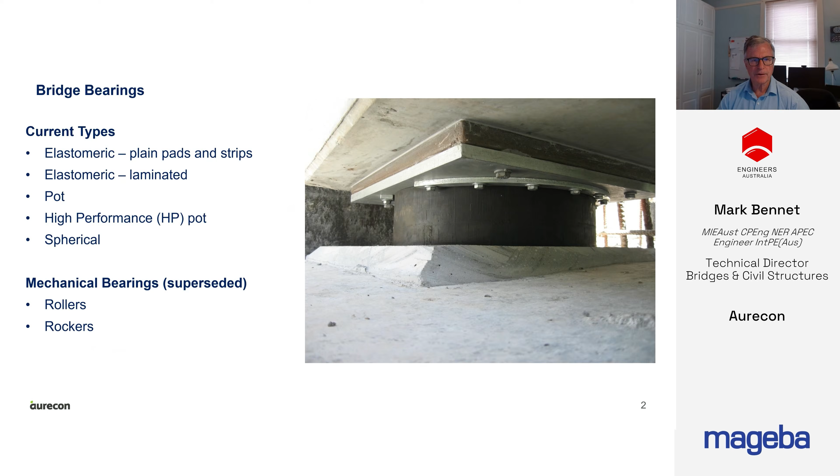The notional design life of bearings and deck joints is set as 50 years, except cast-in components, which should have the same design life as the bridge, and easily replaceable components such as deck joint seals that can have a shorter design life. One of the oldest installations of rubber pad bearings is in Melbourne on the railway viaduct between Flinders and Spencer Street Station.

This bridge was constructed in 1889. A sample of these bearings was tested in 1980 by the Malaysian Rubber Producers Research Association. The rubber hardness was measured at 63 and degradation was found to be minimal. It was concluded that the rubber bearings are still functioning satisfactorily after more than 100 years in service.

However, defects and damage can occur in laminated elastomeric bearings. This photo shows some strange exfoliation of the rubber, which I've seen on a couple of bridges, and also you can get splits and delamination.

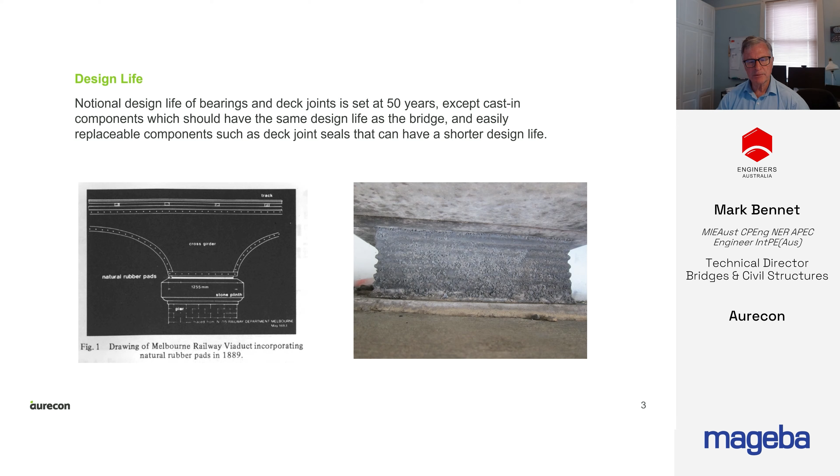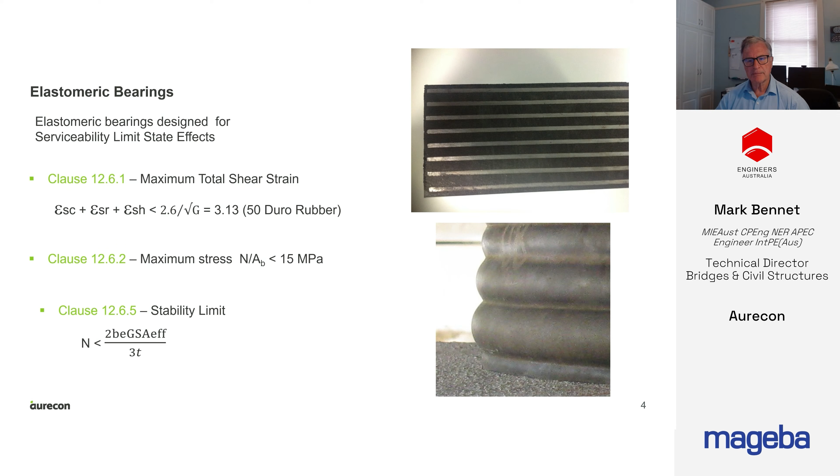Elastomeric bearings are designed for serviceability limits state. This photo shows a cross-section of a laminated elastomeric bearing. What you're looking for is nice uniform layers of rubber with parallel steel plates. In this bearing, the side cover is a bit deficient and the corners of the steel plates should be rounded.

Failure modes include splitting of elastomer and delamination of the elastomer from the steel plates. Normally the stress occurs over time due to cyclic loading. The bearings have significant reserve capacity for infrequent extreme events. So, a bit like fatigue, the design of elastomeric bearings is carried out at SLS.

Select elastomeric bearings over pot and spherical bearings if the load and movement range allows. They are cheaper and more durable than other types of bearings.

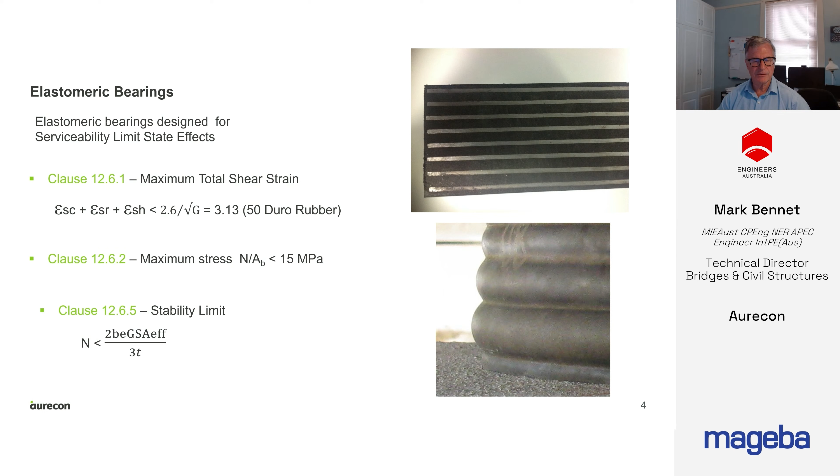The vertical load capacity is controlled by a number of criteria. The first is total shear strain, and you're actually calculating the strain in the rubber at the bulges between the steel plates. There's a general stress limit of 15 MPa, and there's a stability limit - bearings can undergo shear buckling as opposed to flexural buckling.

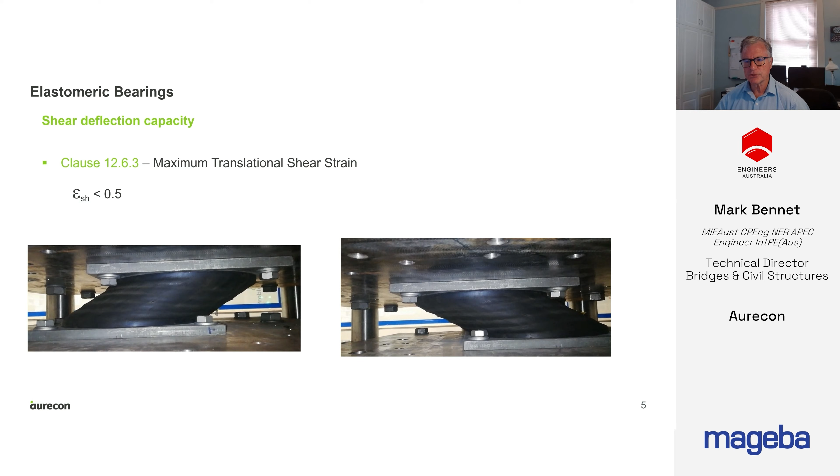The shear deflection capacity is set with a maximum shear strain of 0.5, which corresponds to half the total rubber thickness of the bearing. However, for infrequent loads, elastomeric bearings have a much larger shear deflection capacity. Therefore, clause 12.6.3 states that brake and earthquake forces need not be considered for the application of the shear deflection limit.

The bearing equations are based on full contact over the full face of the bearings. A problem that still occurs too often is gaps in the contact surfaces. Gaps at intermediate construction stages are not a problem. There just needs to be no gap under permanent effects and service load effects.

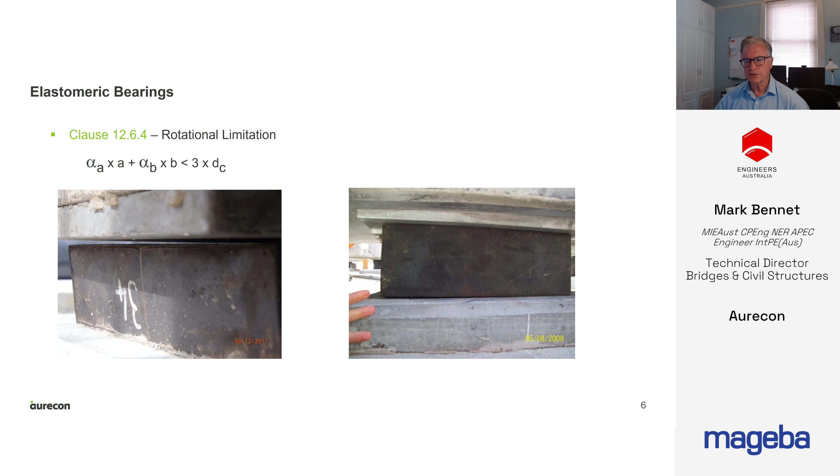Dimensions of tapered attachment plates need to be accurate. Bearing selection needs to be appropriate. For girders erected onto bearings, clause 7.5 requires consideration of construction tolerance, rotation tolerance allowance of 0.005 radians. This limit can be exceeded if the tolerances on individual items are combined, so a good standard of workmanship is required.

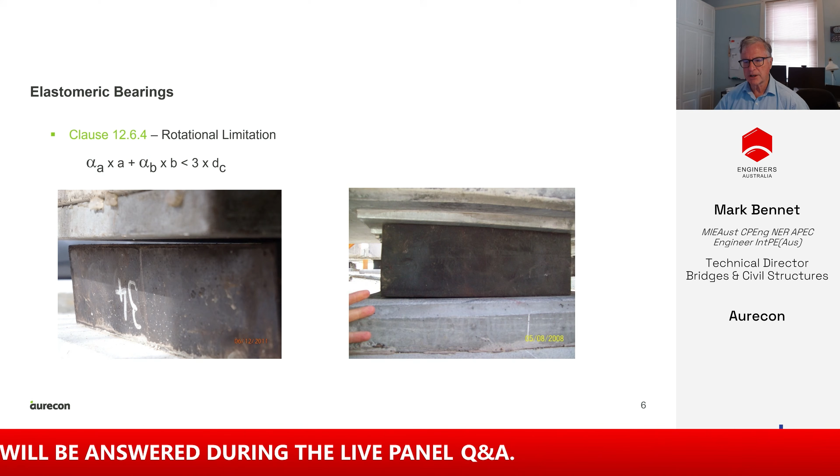The standard provides bearing performance tables for standard bearings. Where possible, bearings should be selected from the range of standard bearings. Most of the calculation work done for bearing selection is done in these tables.

A bearing is identified by an AS part number. This consists of the rubber hardness in square brackets. The next two digits indicate the plan size of the bearing. The middle two digits indicate the rubber layer thickness, and the last two digits are the number of internal rubber layers. The bearing performance tables provide the compressive, shear and rotational stiffness of the bearing, and the shear deflection capacity.

It provides the rated loads at 0 shear and 0 rotation, 0 shear and 0.01 radians rotation, maximum shear and 0.01 radian rotation, and the minimum load to achieve a 0.005 rotation.

Good bearing selection can be made by just referring to the table. With the rotation tolerance allowance of 0.005 and the live load rotation typically 0.003 or 0.004 radians, the 0.01 rotation limit provides a good boundary of the upper rotations that the bearing will undergo.

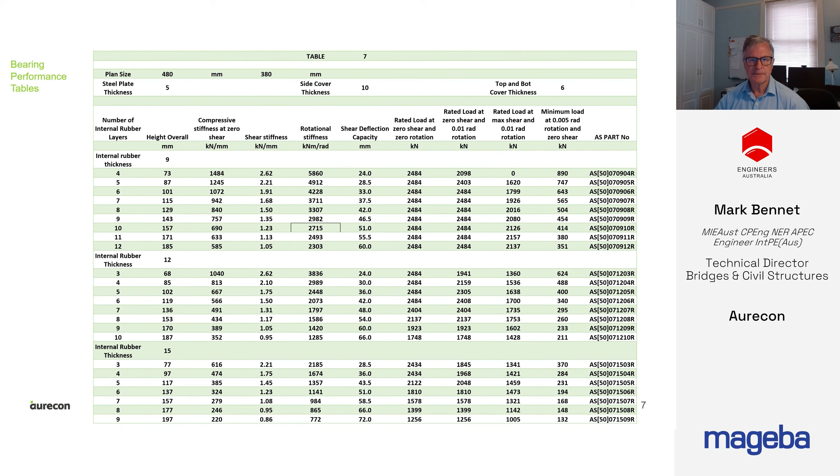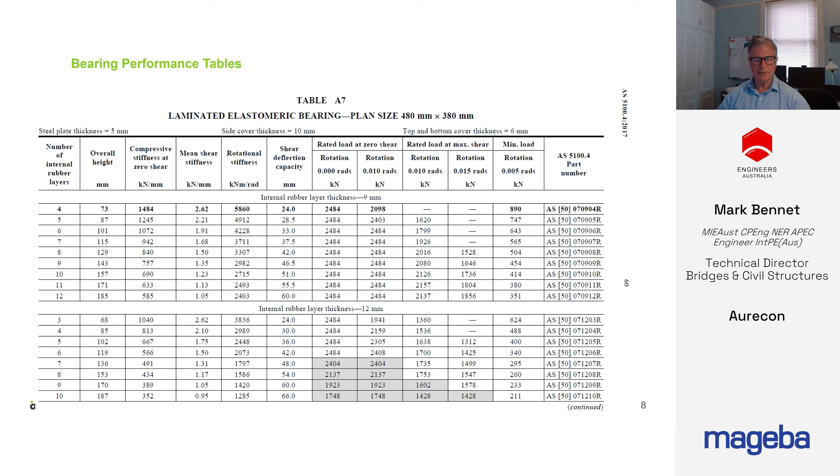This is a copy of the tables taken directly from the standard. The bold numbers are an indication that this bearing doesn't provide for a 0.010 radians rotation capacity, and the shaded area is an indication that the buckling capacity is the limit on the vertical load on the bearing.

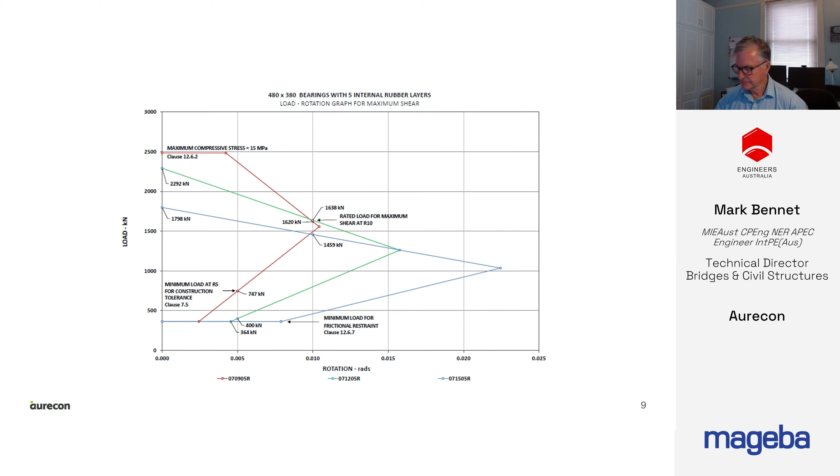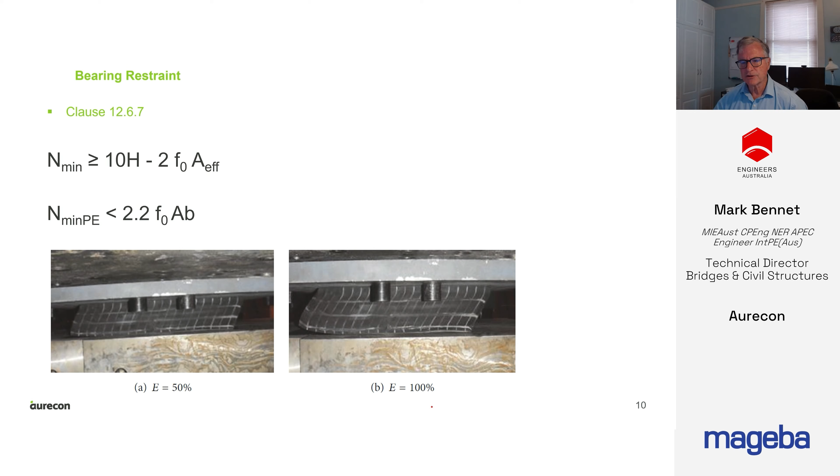Bearing restraint. There were two requirements for bearing restraint. The first equation is a straight friction consideration. So for a bearing deflected to its shear capacity, equation 1 gives a coefficient of friction about 0.17 to 0.20. This photo shows a bearing sheared to 50% shear strain.

The second photo shows the bearing sheared to 100% of the shear strain. When a bearing is subject to shear deflection, the bottom rear corner of the elastomeric bearing curls up. Then with thermal cyclic loading, a caterpillar type action can occur in the cover layer of the bearing that results in the bearing walking out of position.

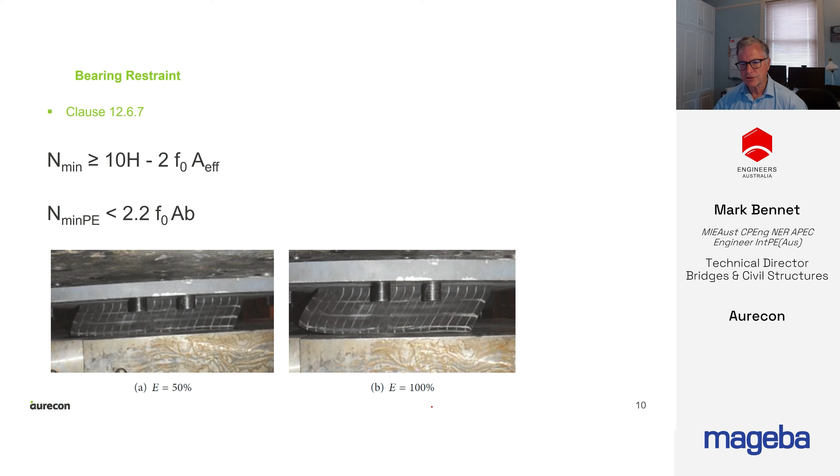To prevent this, a minimum clamping force needs to be applied to the bearing. To prevent walking, a clamping pressure of 2.2 MPa needs to be applied to the bonded area of the bearing. If the clamping force is not available, then mechanical restraints need to be provided at the top and bottom faces of the bearing.

There's been a range of different bearing installation details used over the years. A tapered machine plate is an acceptable attachment plate for an elastomeric bearing, but in New South Wales the common practice is to use a pre-moulded epoxy mortar pad bonded to a steel plate as the top attachment plate. With this arrangement, it allows the taper dimensions to be varied to just a few weeks before girder erection if the measured hogs don't match the predicted hogs.

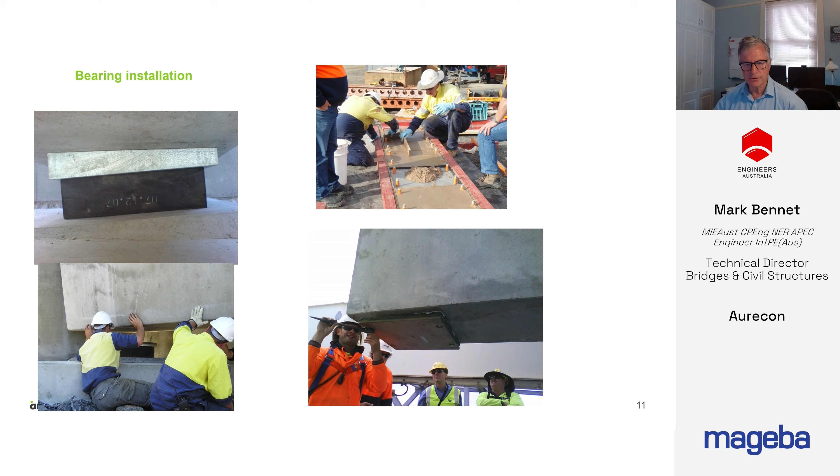So this is a photo of a standard bearing installation that's done in New South Wales. The tapered pre-moulded epoxy mortar pad with the steel plate is screwed, bolted and glued to the soffit of the girder. There's keeper plates that are bolted onto the top attachment plate.

The bottom mortar pad should be detailed to extend at least 50 millimeters past the face of the bearing, so that a minimum of 25 millimeters will be achieved, accounting for construction tolerance.

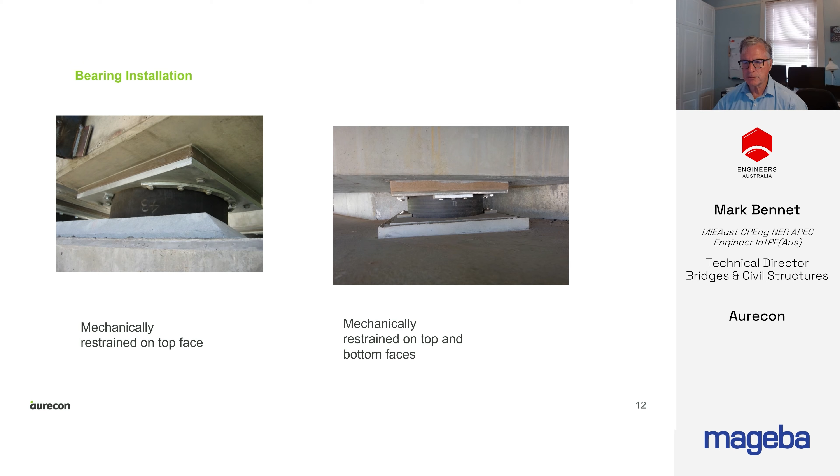Don't construct mortar pads using proprietary non-shrink grout. These shrinkage compensated grouts include expansion agents to compensate for shrinkage, often with a two-phase expansion during setting and during initial strength gain. The unconfined mortar pad can end up with undulations or doming in the top surface. Also, they often have no coarse sand, so end up being very smooth.

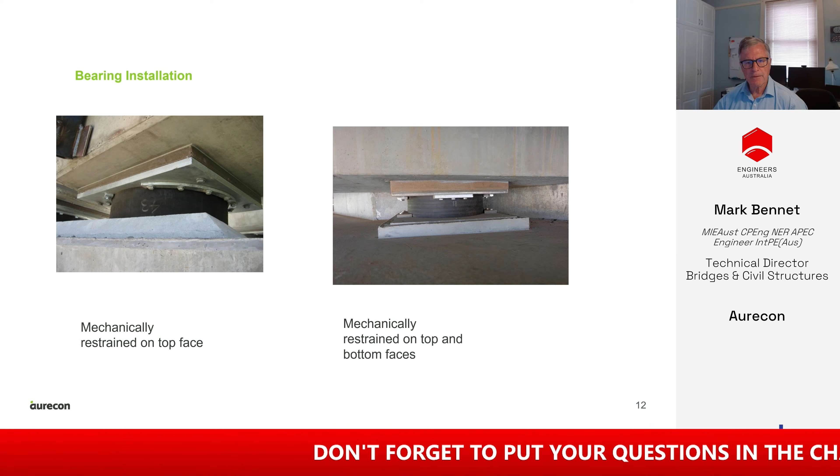For bearings that don't have adequate clamping pressure, mechanical restraints are provided top and bottom, and there needs to be allowance for construction tolerance along girder length.

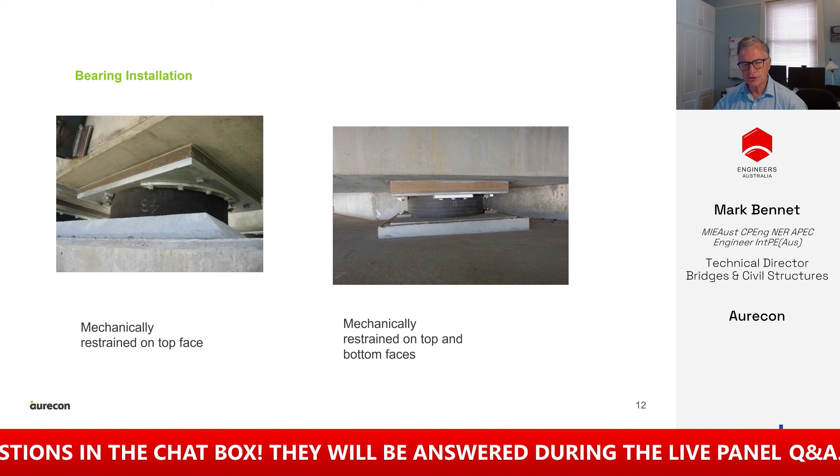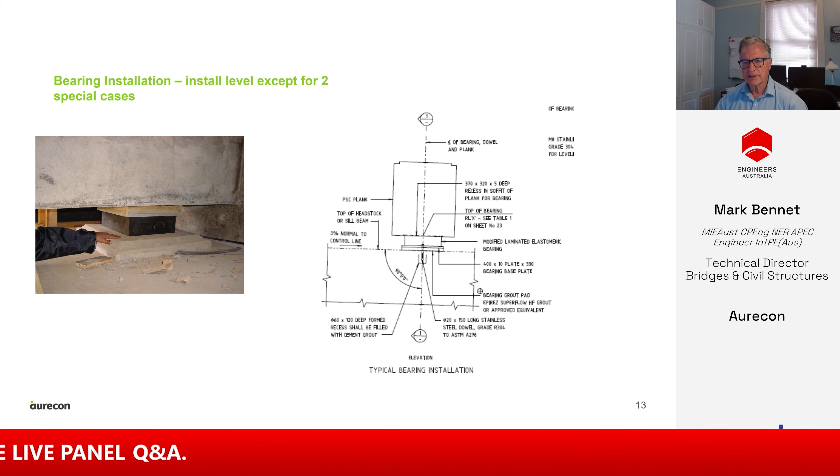Elastomeric bearings should be installed horizontal. There are two exceptions to this rule. Bearings can be installed in inclined pairs. This allows a component of the higher compressive stiffness of the bearing to be accounted for to increase the shear stiffness of the support. This is rarely used. A couple of examples are the Sydney Airport International Terminal Departure Viaduct and the bridge over Lake Ginninderra in Canberra.

For short span bridges and small bearings, it is acceptable to install the bearing on the incline, but the bearing needs to be mechanically restrained top and bottom, and the shear needs to be small.

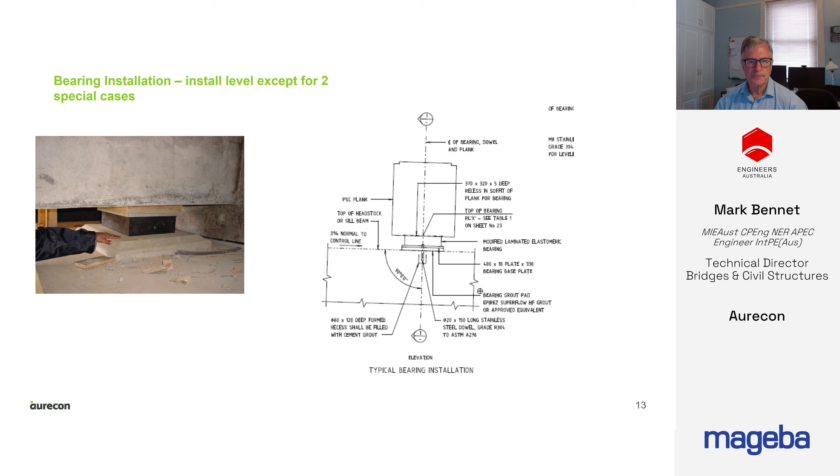If you do install elastomeric bearings on the incline with no mechanical restraint, they can quickly walk out of position as shown in these photos.

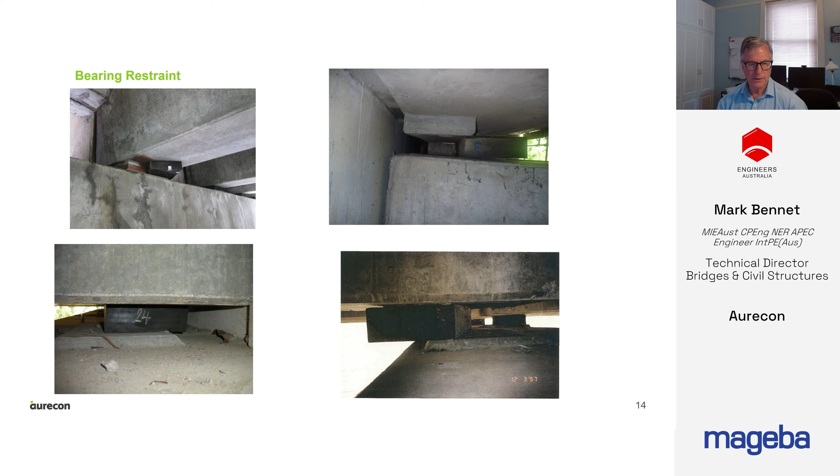Also, if the clamping force on the bearing is too small, but it does have a top attachment plate, then the bearing, rather than shear, can slide back and forth over the top of the mortar pad.

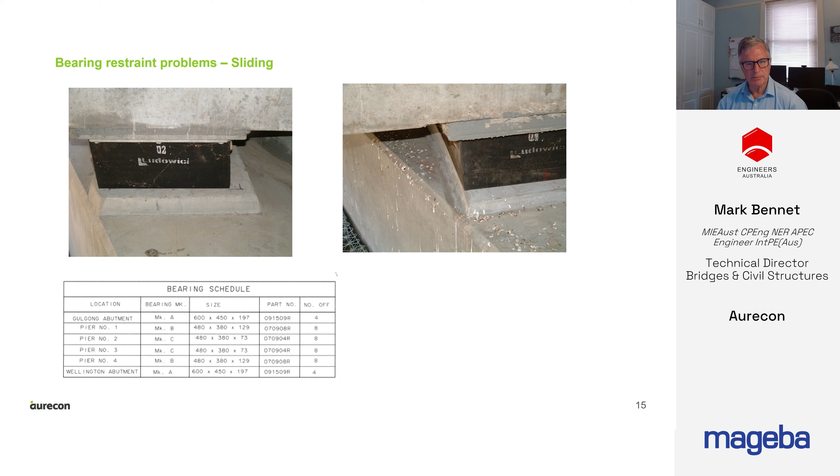If the shear capacity of your elastomeric bearing is too small, you can incorporate a sliding plate interface on the top of the elastomeric bearing.

The thing to note with this approach is that the coefficient of friction of sliding surfaces is pressure dependent, and the pressure allowed on sliding pads is a lot higher than the pressure allowed on elastomeric bearings. So to get a low coefficient of friction, you should make your sliding pad quite a bit smaller than the elastomeric bearing.

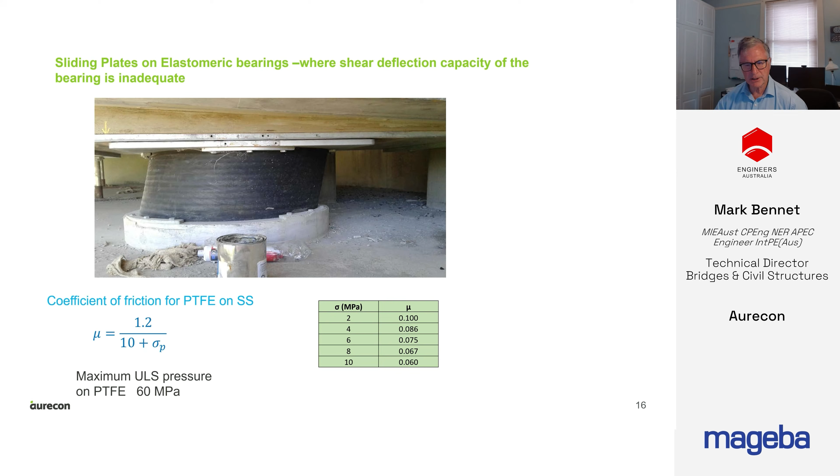Strip bearings are invariably placed on an incline, so should be mechanically restrained.

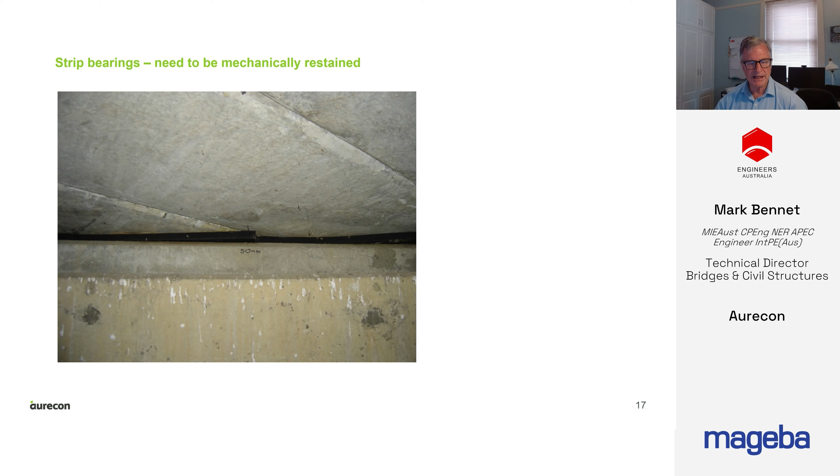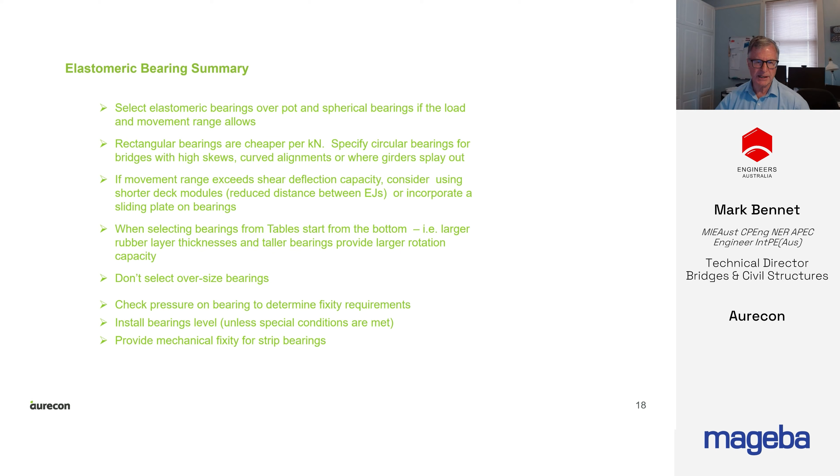When selecting bearings from a table, start from the bottom. Larger rubber thickness and taller bearings provide larger rotation capacity. Don't select oversized bearings. Check pressure on bearing to determine fixity requirements. Install bearings level unless special conditions are met, and provide mechanical fixity to strip bearings.

Conventional pot bearings have been in use for the last 50 years. They consist of a pot with a rubber disc inside, a piston plate, and internal seals. In the past, these internal seals used to be metal rings, and with millions of cycles of rotation, the metal rings used to wear the sides of the pot, and under high pressure, the rubber can shred and extrude from the pot. So these days, POM chain plastic seals vulcanized into the rubber pad are normally used.

Another interesting feature is that where you have a sliding interface using a polished stainless steel sheet, it should be welded to the backing plate to prevent interface corrosion. Unfortunately, in years past, stainless steel sliding sheets were just attached using countersunk screws, and there's lots of bearings with very bad interface corrosion occurring.

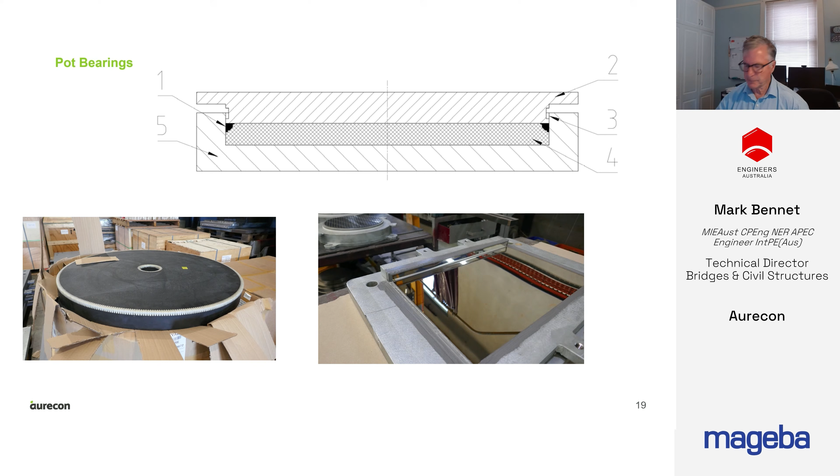There's a new generation of pot bearings, high performance pot bearings. They use the rubber pad with the POM chain seal, and they use an advanced sliding material, not Teflon - in this case, ultra high molecular weight polyethylene. The sliding surface is dimpled to provide lubrication reservoirs in the top of the bearing. With these features, the pressure allowed on the rubber pad and the pressure allowed on the sliding surface can be a lot higher than for conventional pots.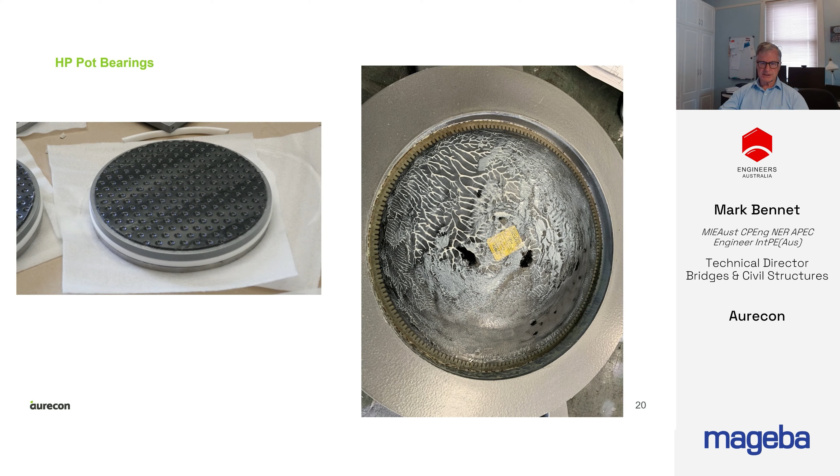A new generation of spherical bearings is also available. This incorporates the advanced sliding material on the conical face and any associated sliding surface.

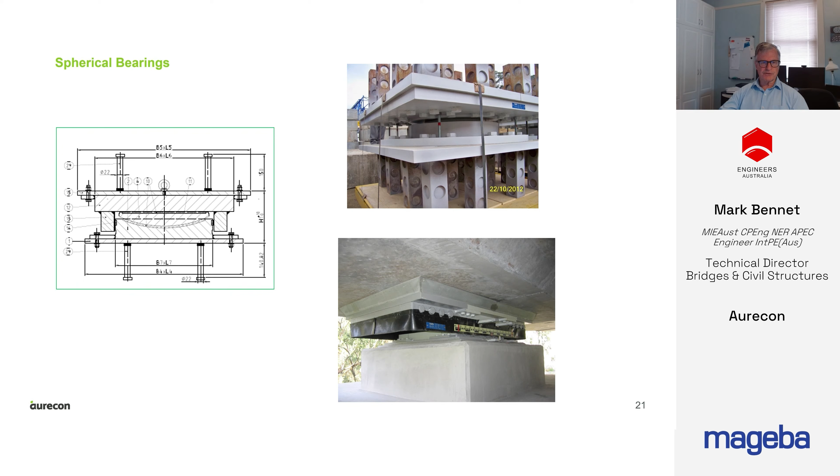Bearing subject to uplift: the form, articulation and span lengths of the bridge should be selected to ensure the bearings are subject to compression under all load combinations. Obviously, for elastomeric bearings, they can't be subject to uplift at either SLS or ULS limit states. For pot and spherical bearings, the standard allows uplift at ULS, but not at SLS. As you can see from this photo, the bearing subject to uplift is much larger and taller than a standard pot bearing.

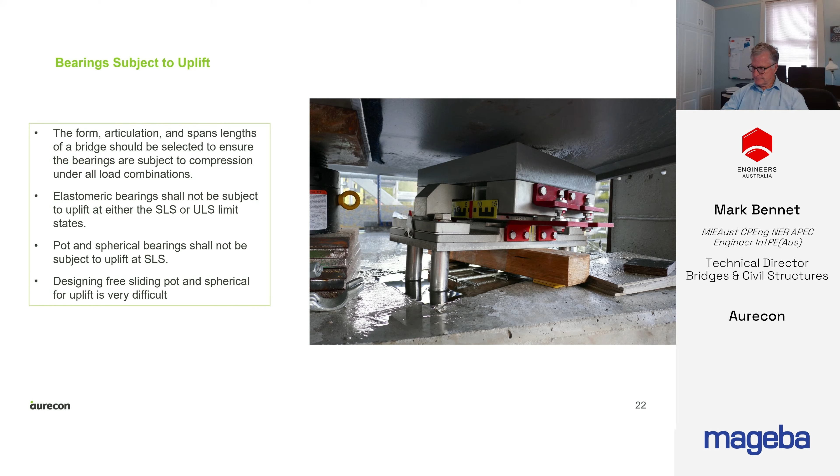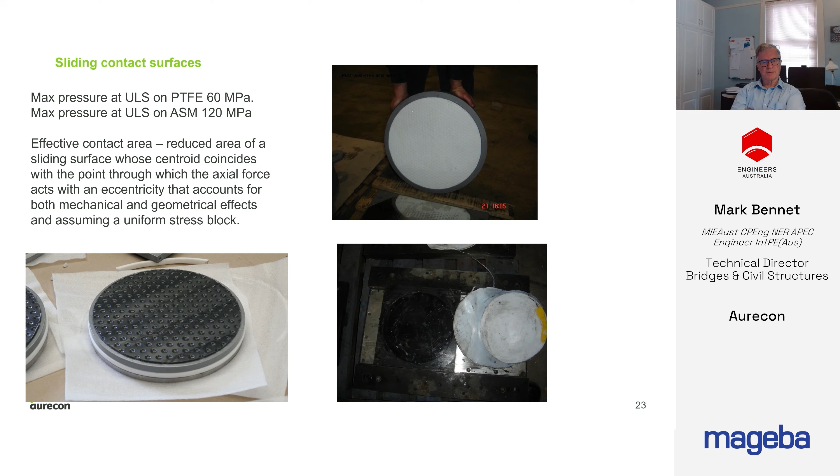Sliding contact surfaces: the maximum pressure allowed on PTFE at ULS is 60 MPa. There are new advanced sliding materials, typically ultra-high molecular weight polyethylene or fluoropolymers, that have a maximum pressure allowance of 120 MPa, but that limit is temperature dependent, and the pressure is calculated on an effective contact area.

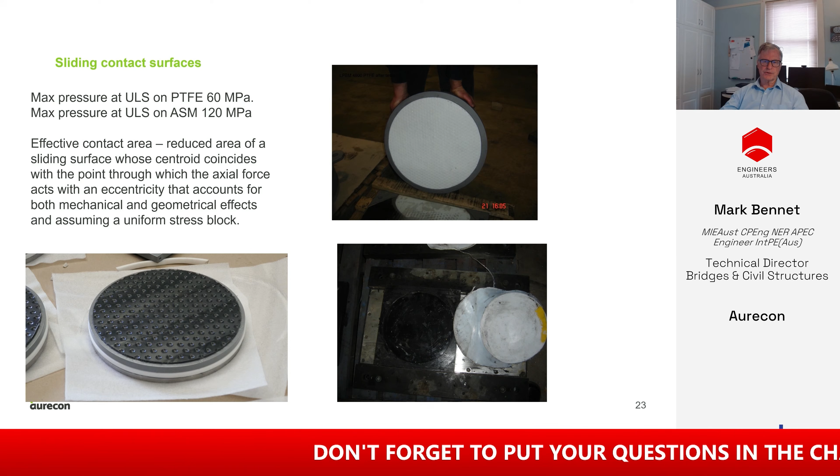This photo shows an old style PTFE sliding surface. In the past, the PTFE wasn't dimpled. If the pressure is excessive, then the PTFE can extrude, or there can be shavings of PTFE shaved off the Teflon disc.

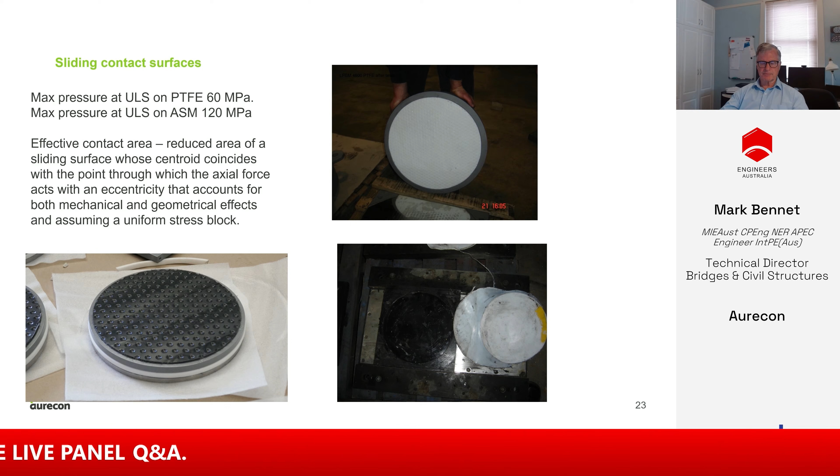A commentary to the latest version of AS 5100.4 is currently being prepared, and a new template for the bearing performance schedule for pot and spherical bearings is being proposed. With this layout, the movement shown on the schedule should include the additional plus or minus 25 millimeters required by clause 2.5. The rotation shown on the schedule is the vector sum of the rotations about the longitudinal and transverse axis of the bridge, increased by an additional 0.01 radians rotation allowance required by clause 7.5.

Where the maximum and minimum vertical loads concurrent with horizontal loads are the same as the general maximum and minimum vertical loads, the concurrent vertical loads need not be shown. Where uplift at ULS occurs, an additional column should be added to the schedule showing the minimum SLS vertical load on the bearing.

To minimise the risk of construction errors, where the difference between the longitudinal expansion and contraction movements is less than, say, about 40 millimeters, it is recommended that the movement range be shown as plus or minus the largest movement, to avoid the need for a preset.

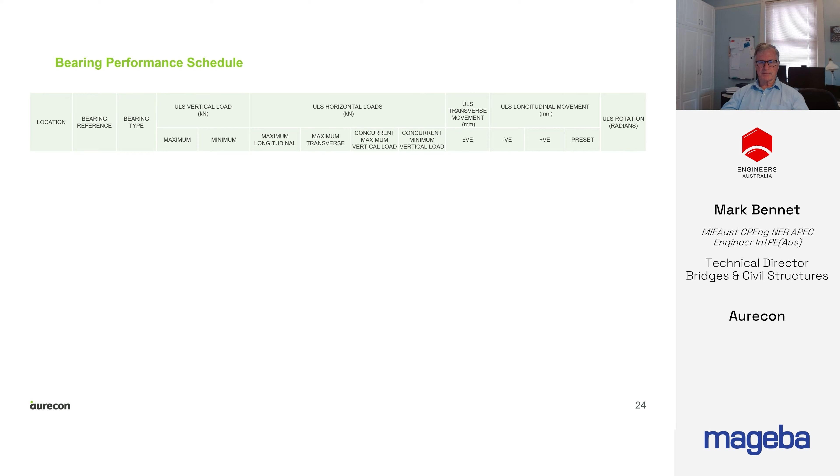Pot and spherical bearing catalogues: pot and spherical bearings are custom designed for the loads and movements provided in the bearing performance schedule. The bearing catalogues give an approximate indication of the size of the bearing. However, stainless steel bearings will be substantially larger than structural steel bearings. If the ratio of horizontal force to vertical force is high, the bearings will be larger than shown in the catalogue.

Bearings that need to resist uplift will be significantly larger and taller. To allow for variation in bearing dimensions, it is recommended that pot and spherical bearings be installed on a reinforced concrete plinth whose height can be adjusted. Also, it's recommended that a trial grouting of an attachment plate be carried out to confirm the suitability of the proprietary grout and the grouting methodology before installing the bearings.

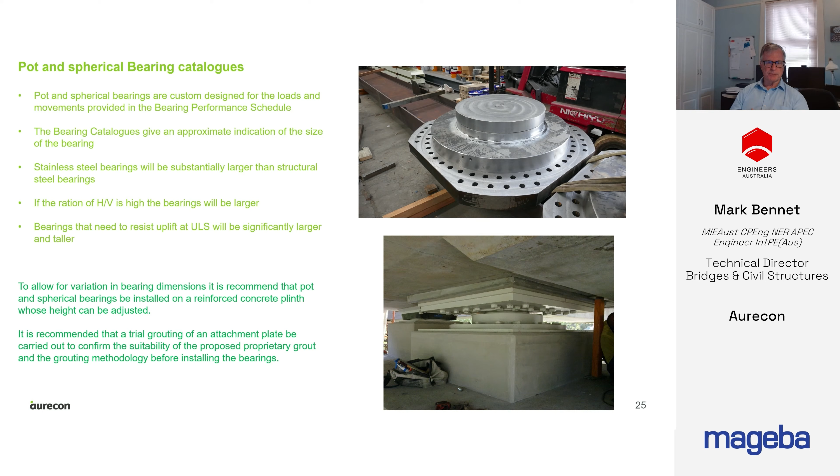To allow for the higher pressures from high performance pot and spherical bearings, load limits for reinforced concrete substrates are provided. These are higher bearing limits than in AS 5100.5, which are for unreinforced concrete substrates. The reinforcement for these reinforced concrete substrates needs to be designed using strut and tie or pre-stressing anchorage detailing design requirements.

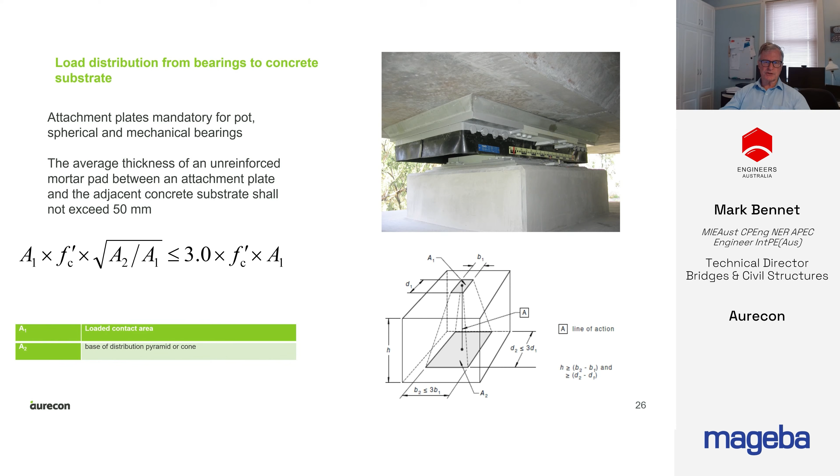So just to finish up, some final words on deck joints. In AS 5100.2, the ultimate braking forces are much higher than in other bridge codes, including AASHTO and the Canadian Bridge Code. For this reason, it's specified that deck joints be designed for ultimate limit state movements due to temperature, creep and shrinkage, and SLS braking movements.

On the basis that strip seal joints can overextend and close up without damage, for strip seal joints it's permissible to ignore braking movements. But the deck joints also need to be designed to accommodate any foundation movements that may occur.

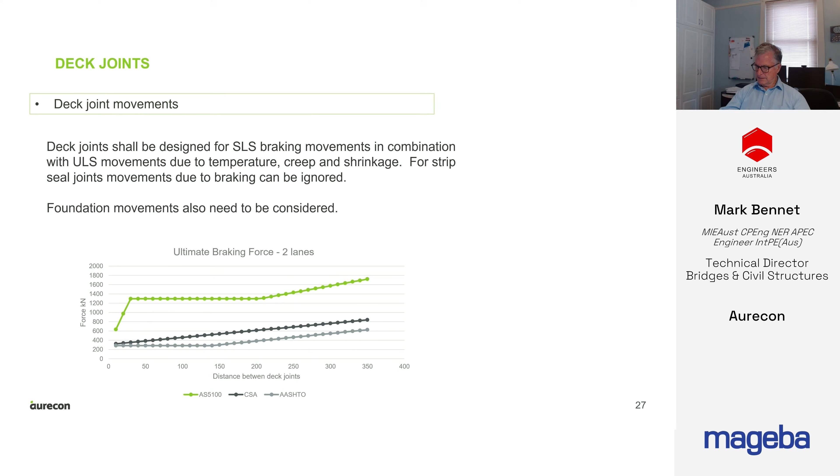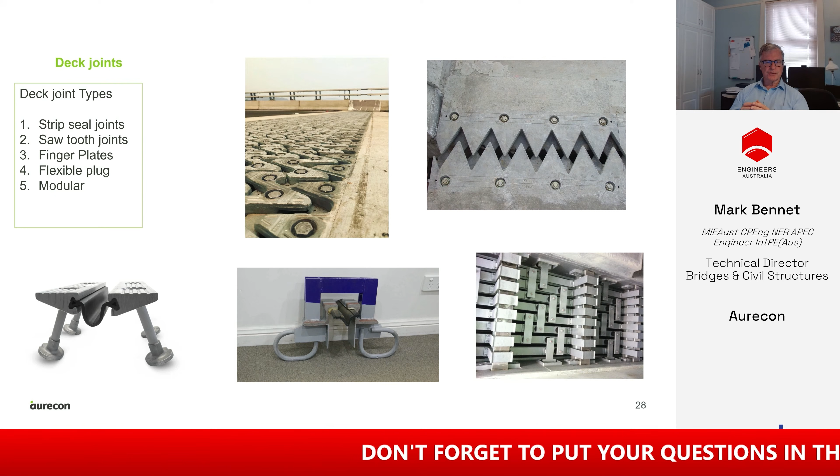The standard provides provisions for 5 types of deck joints: strip seal joints, sawtooth joints, finger plate joints, flexible plug joints, and modular joints.

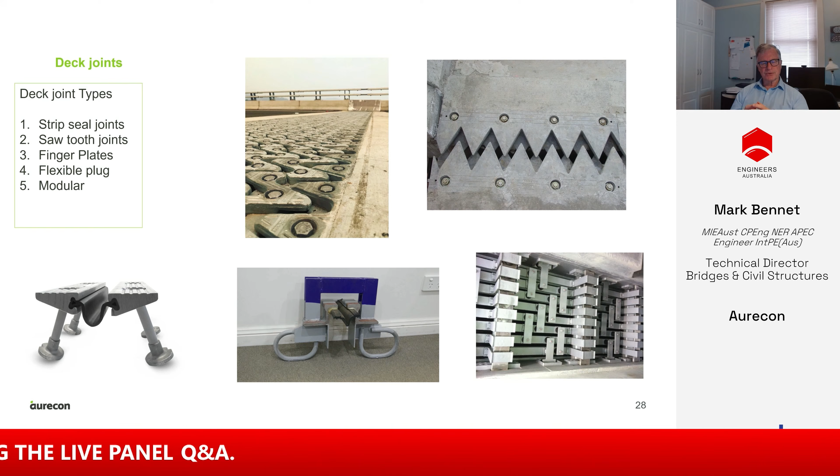This photo shows a modular deck joint with noise reducing plates on the top. Modular joints are expensive mechanisms and should only be specified where other types of joints will not work.